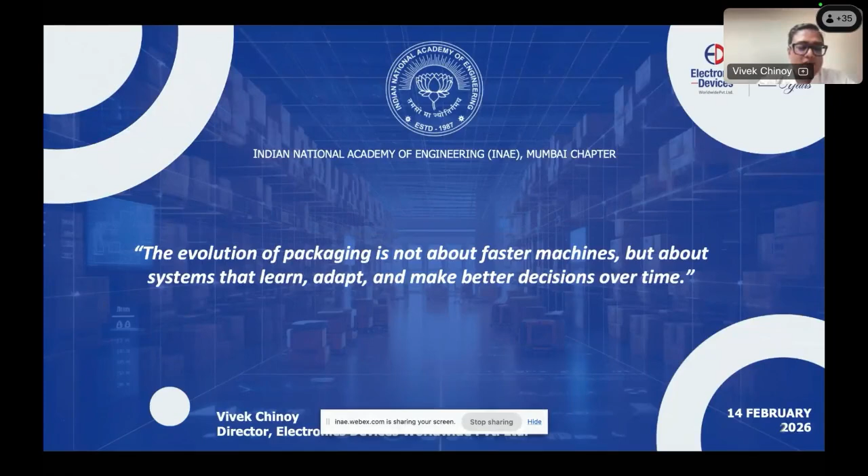Before I start my presentation, I'll take a moment to introduce the company I work for. It is called Electronic Devices Worldwide Private Limited, and it was started by two technocrats, Mr. S.V. Chinoy and Mr. R.B. Singh, who in the past 51 years have delivered many solutions for Indian industries, helping them grow and reach their goals. I will highlight a few of them.

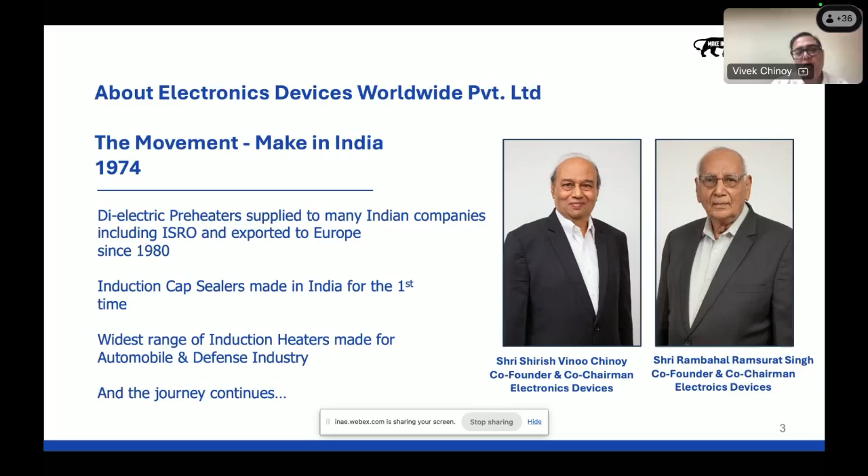The starting product was a dielectric preheater, which was used by many Indian companies, including ISRO, and it was exported to Europe since 1980. India got its first induction sealing system in 1989 by the same company. Then, when the automobile and defense revolution started, they developed a host of induction heaters to offer metallurgical solutions. So the Make in India movement was started back in 1974.

For nearly 5 decades, packaging engineering succeeded without intelligence. And that is not a criticism, it is a testament to human ingenuity. Machines executed instructions. They had no memory, no feedback, no learning. Engineering success lived entirely in the heads of experienced engineers.

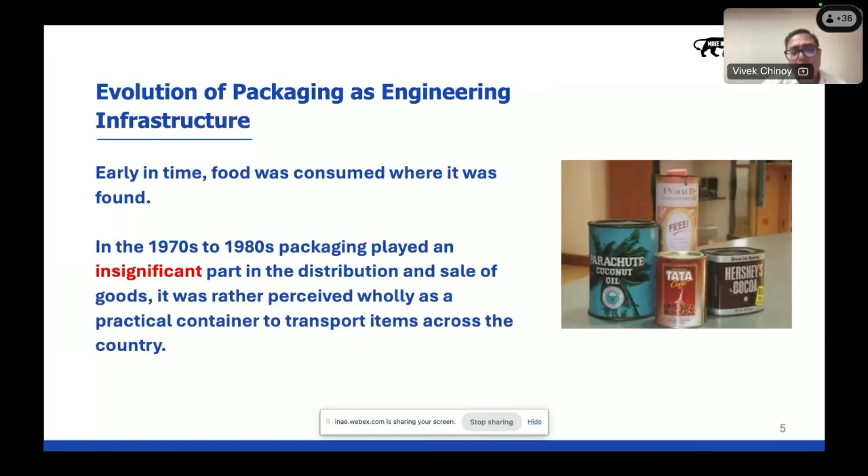Early in that time, food was consumed where it was found. In the 1970s and 80s, packaging actually played a very insignificant role in distribution and sale of goods. It was only considered as a container to transport items from point A to point B all across the country.

If we look at packaging between 1970 and 1995, the dominant question was simple: will it hold? Paper, glass, tin plate, early plastics. Engineering was very mechanical, deterministic and manual.

The GDP at that time was barely 62.4 billion, and in 25 years it grew 6 times, to 360 billion. You might remember going to a doctor and him giving you medicine in a glass bottle with a cork on top. That was the kind of packaging available at that time. However, it still contributed 10 to 11% to the GDP, not because it was intelligent, but because it was essential.

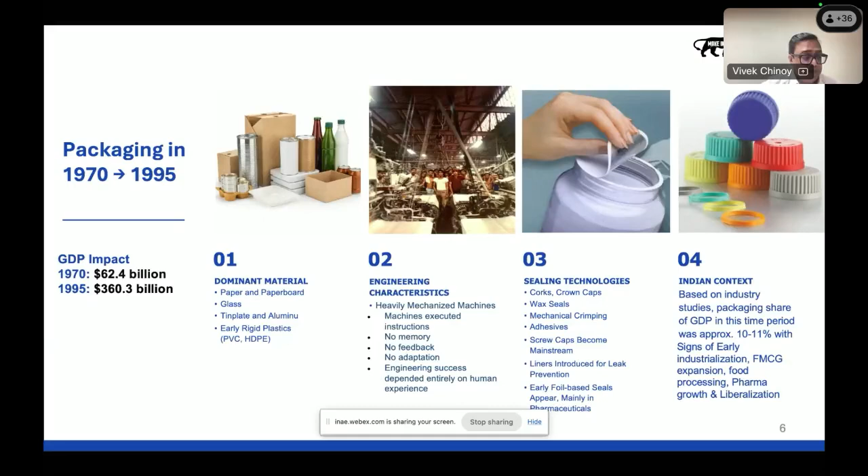Liberalization changed one thing fundamentally between 1996 and 2005: our expectations. Packaging was no longer just about containment, it was now about consistency, compliance, and credibility.

There was a lot of advancement in materials. PET bottles came into play, aluminium foil laminate liners started being used across, and multi-layer flexible packaging was also now the new normal.

On the engineering aspect, we saw that the machines which were earlier running at 30, 40, 50 packs per minute were now being demanded for 120 packs per minute. These manufacturing plants across the country started asking for continuous production lines, and there was increased focus on consistency and repeatability. And we saw a small transition from electrical equipments to electronic equipments.

This is where induction sealing quietly entered the picture, not as intelligence but as control. People wanted to control that they could move the product from their factories to consumers far away, hundreds of kilometers away. And we saw that the Indian packaging industry grew at that time from 15 to 20%.

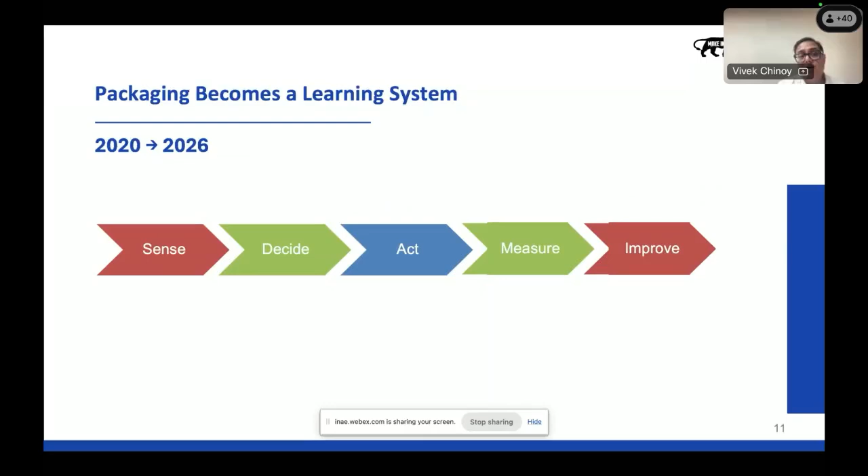Each of these machines, upstream and downstream, had to be integrated. Filling lines were integrated with online inspection systems, and connected to serialization. That means they needed data traceability throughout the packaging line. Plant managers started focusing more on throughput optimization, reliability, process repeatability, and regulatory compliance. From sealing a container to protecting the product life cycle, this was the transformation that happened.

By 2020, packaging was no longer an isolated end-of-line activity. These also gave rise and contribution to our overall GDP. In 2020, our GDP was 2.6 trillion, and today in 2026, it's almost $4.16 trillion.

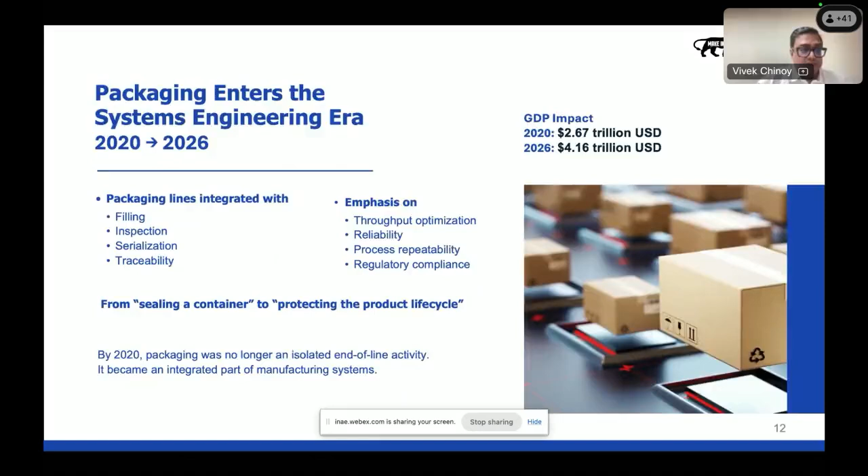Induction sealing is not important because it seals caps. It is important because it sits at the intersection of energy, material, time, and compliance. Because of so much upgradation, we are able to offer audit trails to our customers. It continues to consume the lowest power consumption per seal when compared to any other process.

In my upcoming slides, I will also emphasize zero defect sealing, which is now possible, and integration with real-time non-destructive seal integrity tests. Because of all these advancements, induction sealing became an industry norm and started being used in over 150 industry domains.

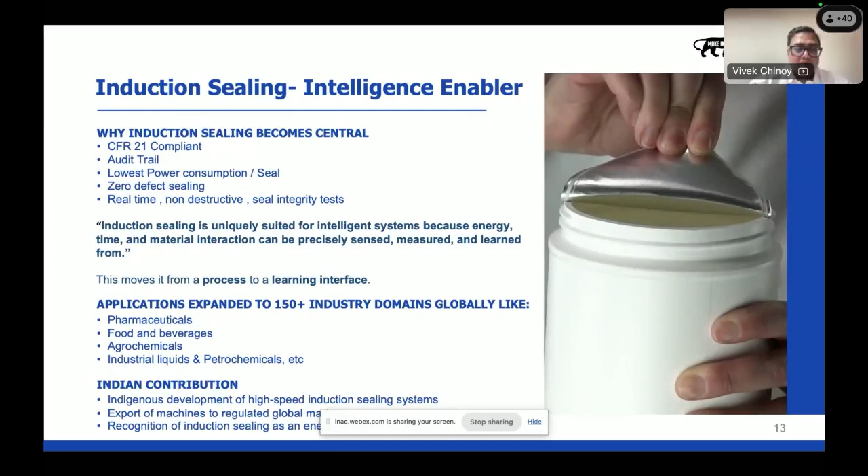Anything that can be precisely sensed, measured, and repeated is a candidate for intelligence. Induction sealing moves from process to learning interface.

Now, all of this could not happen without indigenous R&D. We are glad to inform that our R&D is world-class and is DSIR certified. We have established world-class infrastructure for power electronics, control electronics, engineering, energy efficient induction sealing systems, and closed loop process control. Our R&D department has published over 81 technical papers, of which 5 publications were selected for Best Technical Paper Award.

We have received 5 patents and 2 are pending. India did not become globally relevant in packaging by copying machines. We did it by building engineering depth. For R&D, anyone in machine building or on the technology side, R&D should not be treated as a department, but as a long-term cultural decision.

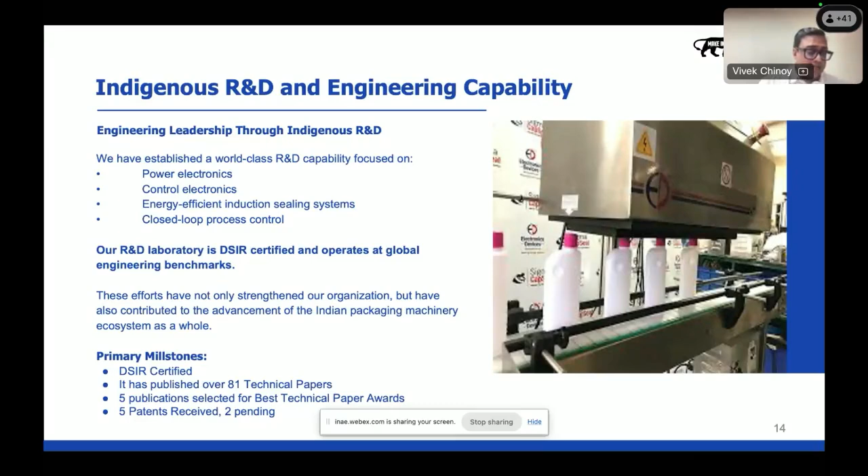Because of which we have also received many awards. We have received the prestigious National Technology Award for zero ventilated caps. Economic Times has recognized us with the Innovative Company Award. We have proudly received 6 Pack Machine Awards from IIP over 2 decades. The Governor of Maharashtra has recognized us with the Pride of the Nation Award, so on and so forth.

I want to deep dive a little more into what kind of innovation we have done and take you through a little technical side of this presentation. I'm playing a small video. Here I will be showing and discussing with you 2 approaches on induction sealing: one is the traditional approach, and second is the innovative approach which we are following.

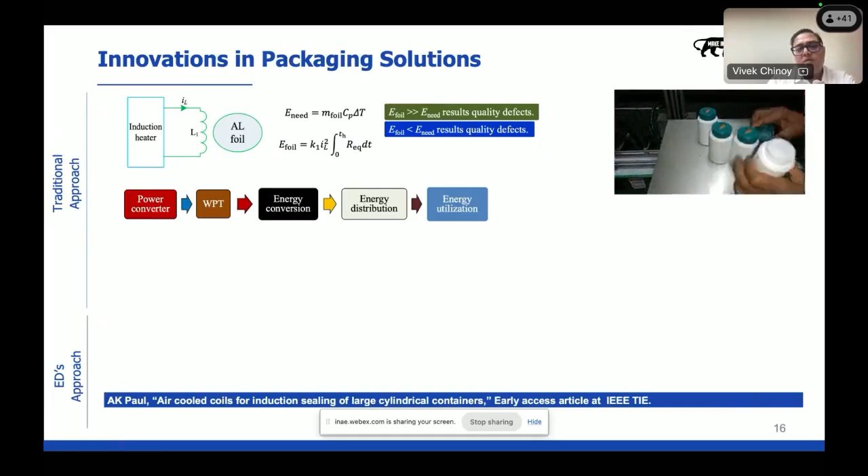In the traditional approach, in the induction heater there is a power converter which generates the power and it is wirelessly transferred. That wirelessly transferred power converts into energy, which is then distributed and finally utilized. In this traditional process, power conversion is about 97%, and wireless power transfer is about 94%. However, energy utilization is only 20%, and process efficiency is only 18.8%. This can be compared to any induction cooktop you might be using at home or have come across.

Now, what are we doing different? What is ED's innovative approach? We became active in passive components, which is the coil design. Let me show you - we are going to reveal this for the first time in the next few slides, what is actually happening inside the machine.

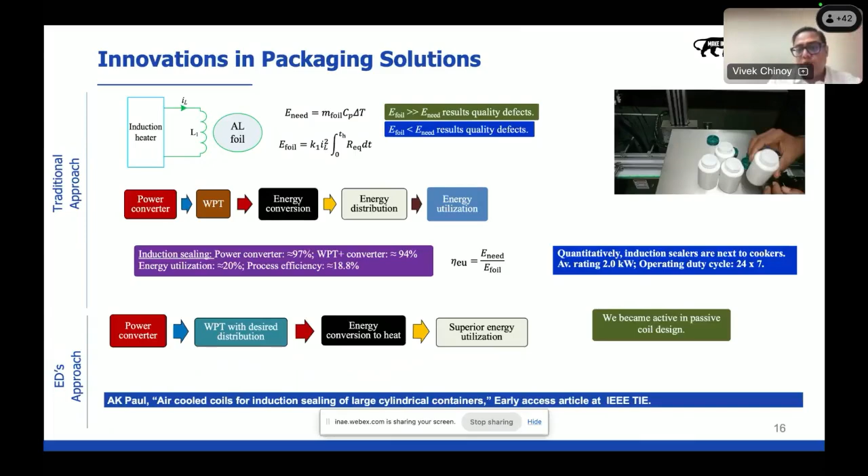The power that is converted is wirelessly transferred, and at the same time it is distributed. This is a unique approach. And because both things are getting done at the same time, the energy conversion to heat is very, very high, and because of that, the energy utilization is superior. Let me show you a little more in detail.

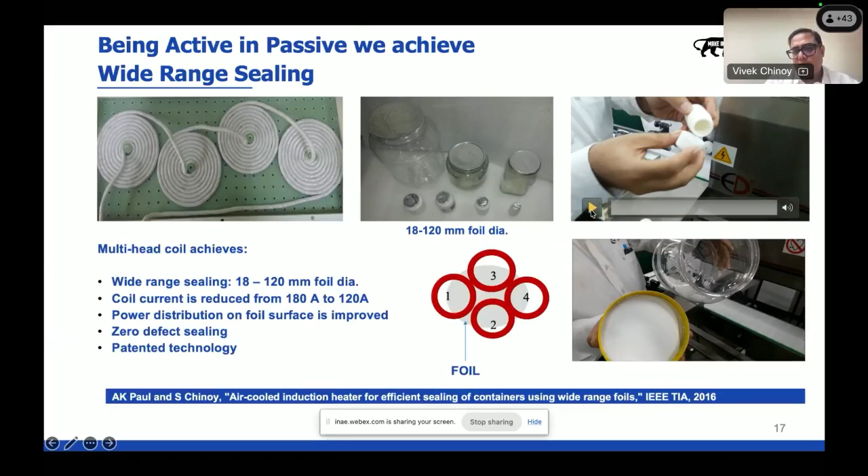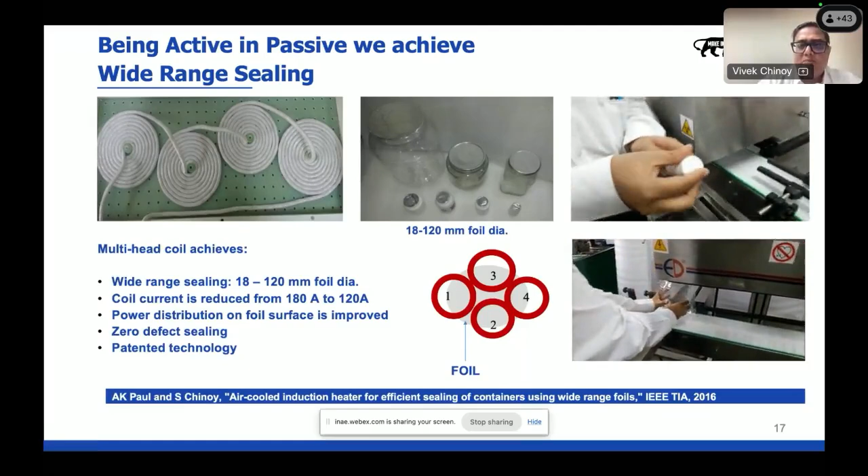This is our multi-head design of the sealing head, where you can seal 18 to 120 millimeter foil. I'll play the video of two different bottle sizes: one is 18 millimeter, another is 120 millimeter. Both are getting sealed under the sealing head at the same time with the same parameters, same line speed, same power setting. Only height is changing because of the bottle size.

What we have done differently is zonal heating. We have divided the heating zones into four. Because of this, there is no hot spot and cold spot - you get uniform heating. As a result, the coil current reduces drastically from 180 amperes to 120 amperes. Power distribution is uniform and far improved, and that has led to zero defect sealing. This is a patented technology.

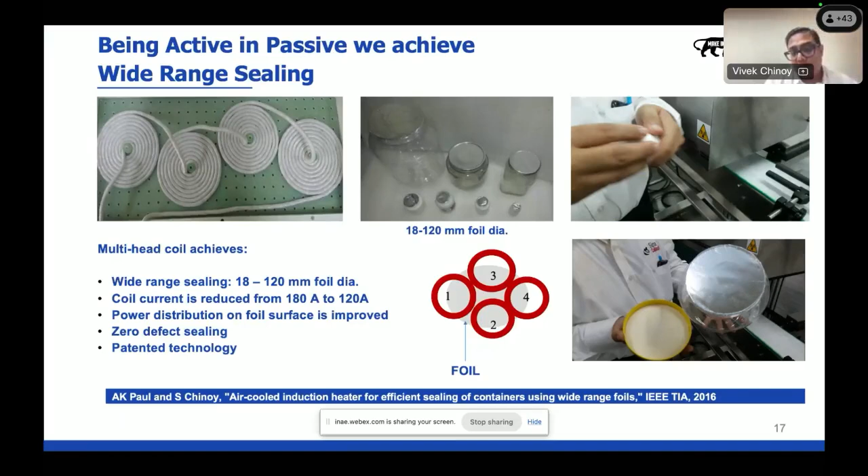Now, when I say active and passive, I am revealing a lot of technology here. This is a transition from what was happening traditionally to what is happening today, and why it is smart, and how it is helping packagers to pack or seal their containers and transport them world over very comfortably without worrying about a leak.

Back in the day, the water-cooled coils were designed like this, as the first drawing shows. And here there was a limitation. You could seal only up to a certain diameter, maybe 70 or 80 millimeters. And then when you had to seal larger diameters, you had to have a different sealing head design.

From there, we transitioned to Litz wire air-cooled coil. And here also we had a similar topology where we could do only a certain diameter, and then to do wide neck jars we had to design a different sealing head.

This was solved by designing a multi-segment air-cooled coil for wide range sealing. You can see these spirals here, this circular coil, and this is the new design where 18 to 120 bottles can be sealed very easily.

To take it forward, the below three drawings are even more advanced, because we are into continuous R&D. The first drawing is made for a wide geometry of containers, which means if you had a round container, square container, rectangular container, small dia or big dia, everything will get sealed under this sealing head at the same speed.

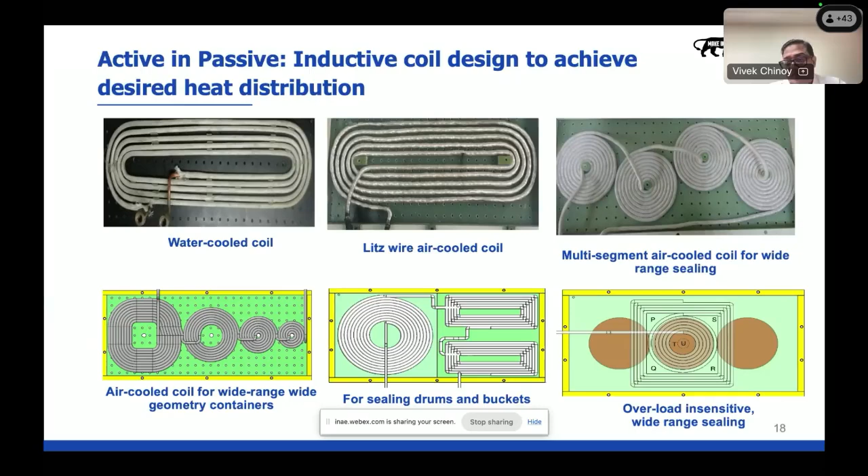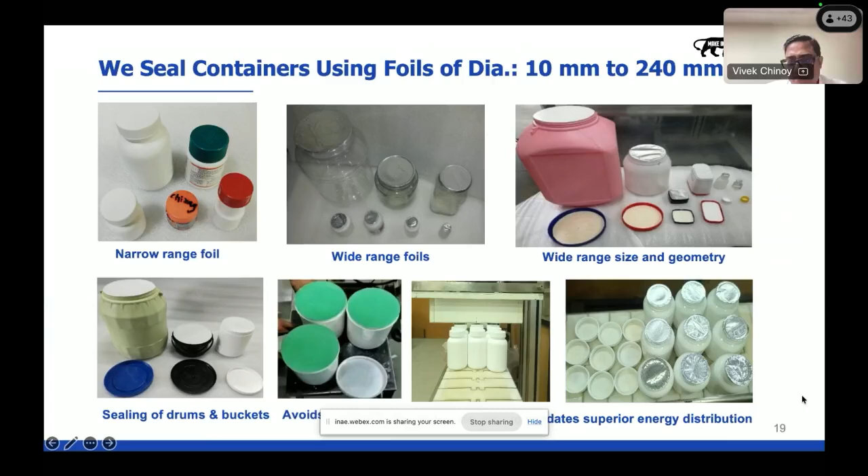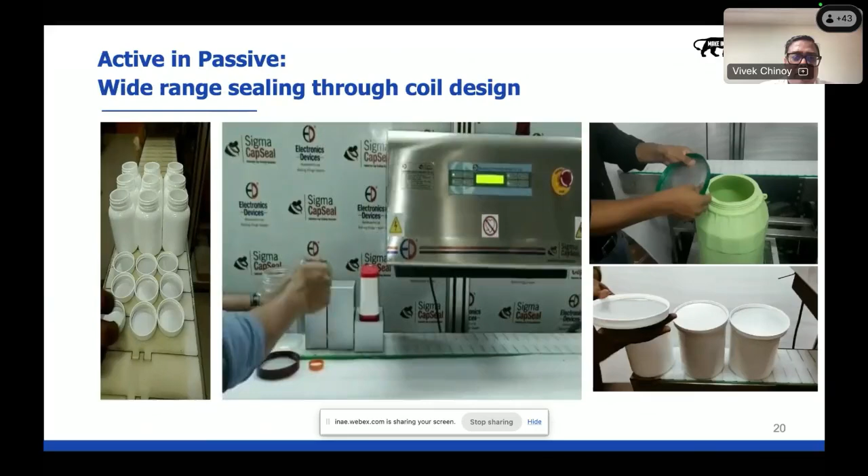These are some images of bottles when we actually tried them. I want to show you a live video of what is happening. You will see different geometries of containers. We have used some fixtures to put them at the same height so that it is easy to demonstrate.

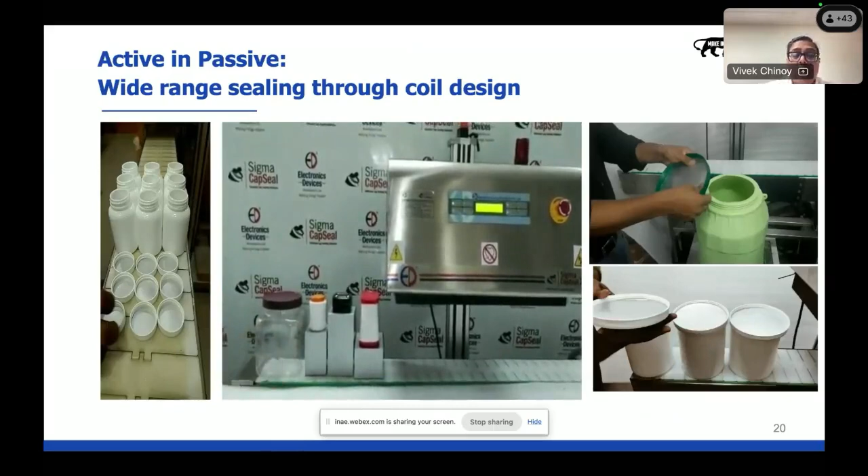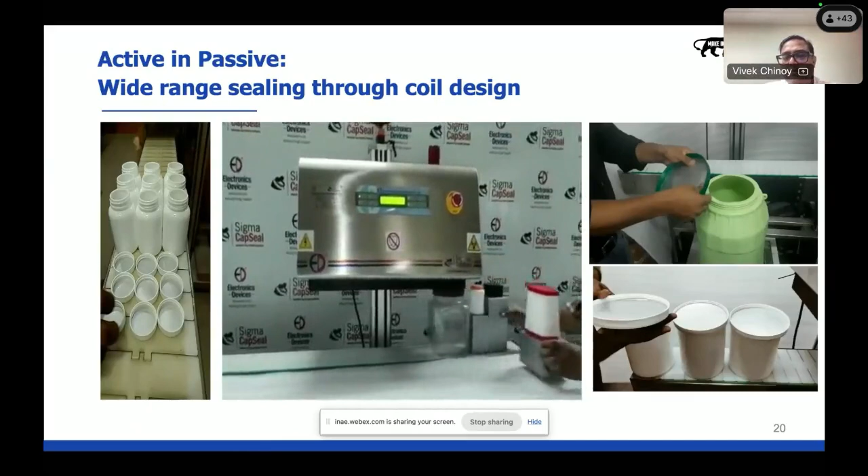Various geometries get sealed under one sealing head at the same parameters. No need to change parameters, no need to even shift the sealing head. In some manufacturers, they prescribe tilting the sealing head. In our case, no need. Very, very innovative sealing head design.

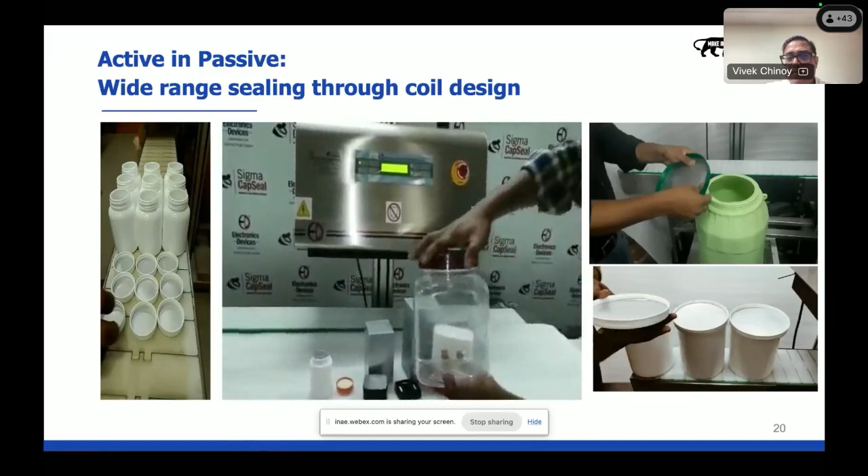This is for wide neck drums. The green cap with the big drum.

When you do this, it not only allows higher sales for our customers, but also gives them a lot of confidence that they will have a leak-proof product traveling across the country or even beyond our country's borders.

These are all oversized containers used by protein powder manufacturers and food supplement makers who have wide neck jars, which can overload the induction heater. It doesn't overload the generator at all.

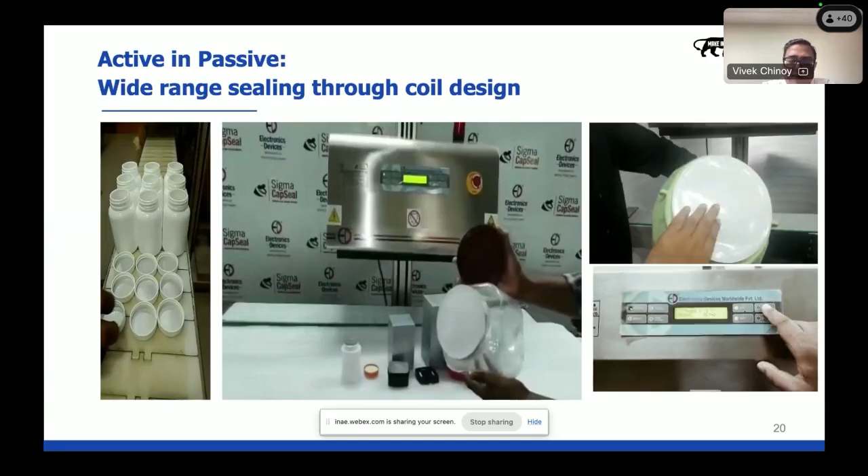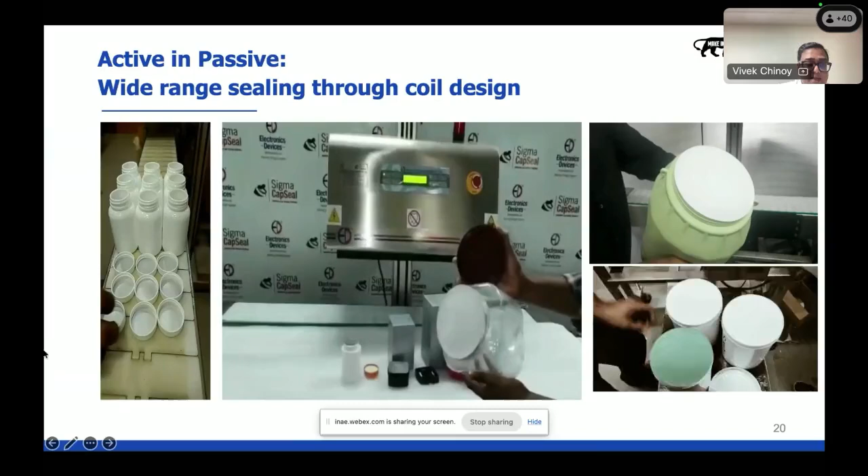Well, I have saved you the best video for the last. This is our latest multi-axial coil design where a matrix of bottles can be sealed under a sealing head without any leak. And this is happening for the first time in the world.

Traditionally, all the bottles need to travel only from the center in one line, whereas here you will see that they are traveling in a matrix. This is first time in the world and a very innovative design. This is also our patented technology.

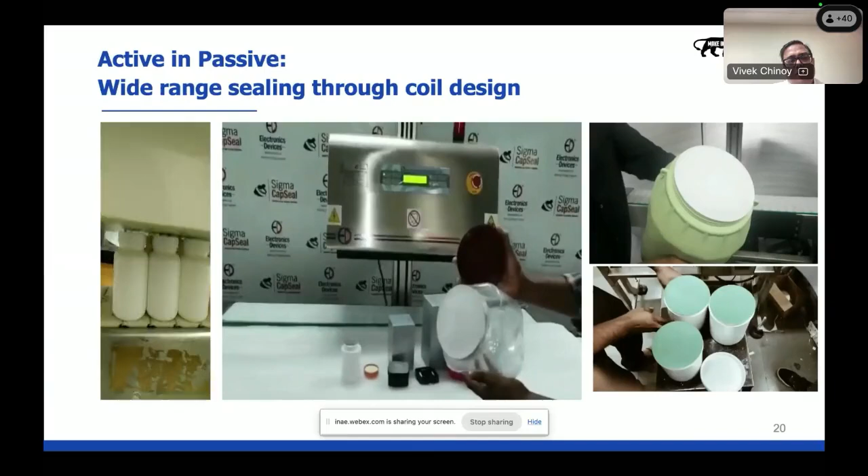So which means that the same machine can now deliver, using the same power, three times the speed. So much power saving, so much space saving also. All the bottles are perfectly sealed.

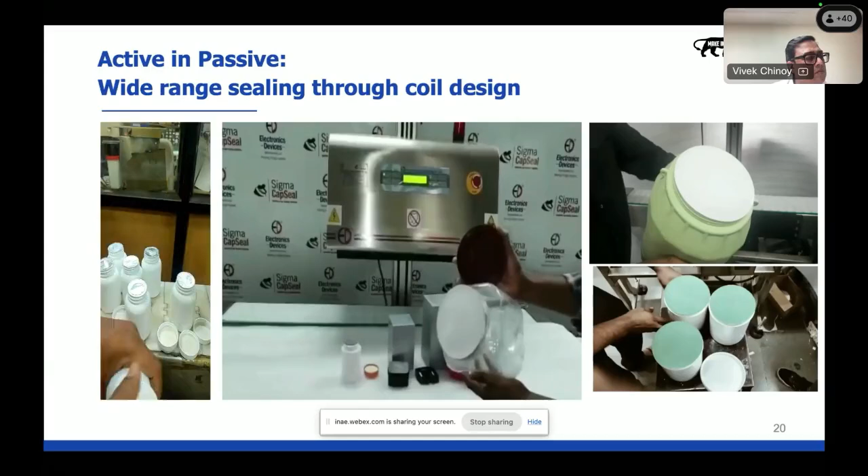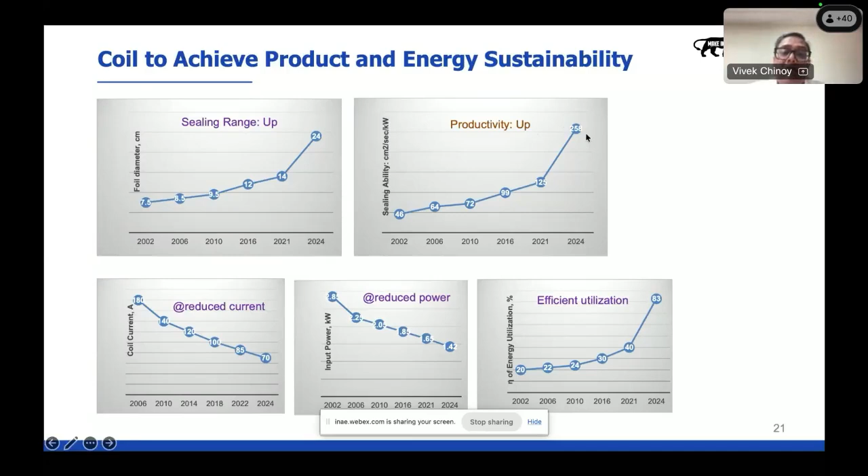I had shown you this in my traditional sealing slide. And now it has gone all the way up to 83%. So power is getting fully utilized with very little loss, and productivity has gone up. Earlier, the sealing ability was 46 square centimeters per second per kilowatt, which has now come up to 258 square centimeters per second per kilowatt. So lot of savings and lot of improvement in the overall design.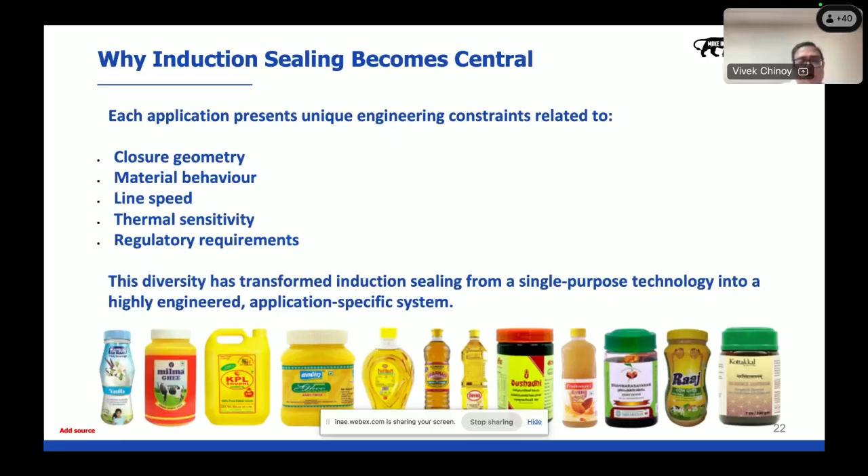While doing so, each of these applications presented unique engineering constraints related to closure geometry, material behavior, line speeds, thermal sensitivity, and regulatory requirements. By this time, regulatory requirements became more and more important, for which we had to design a new induction seal integrity testing system, which could do non-destructive tests online and give real time data.

Let me show you a video which demonstrates that.

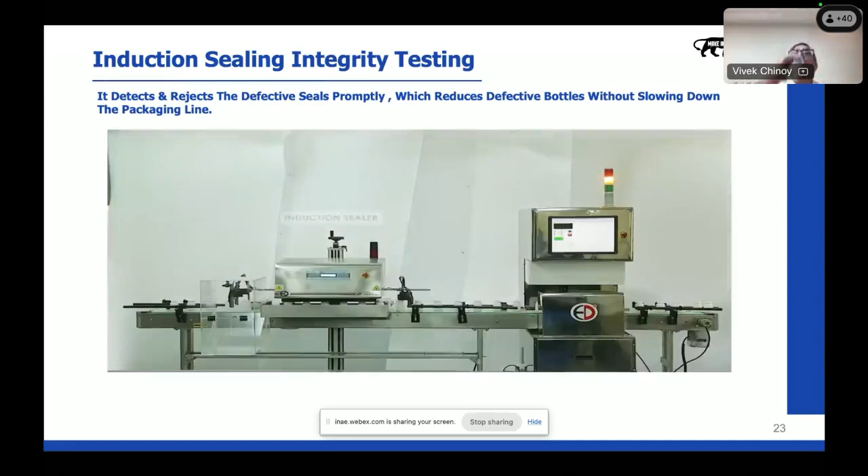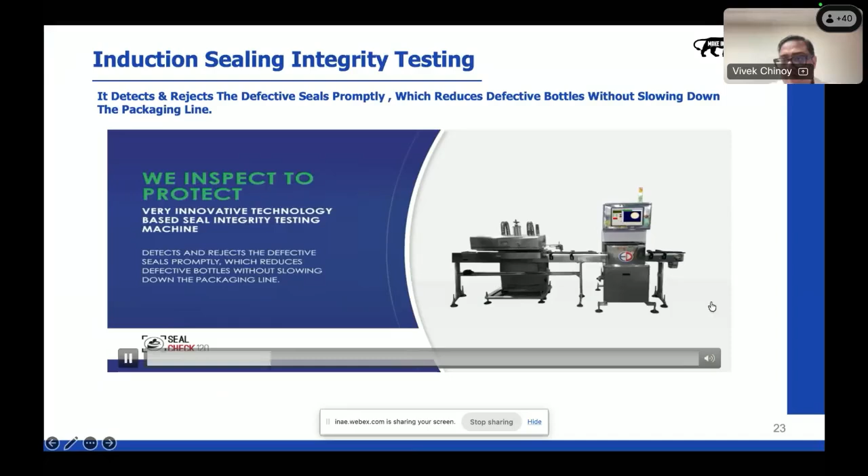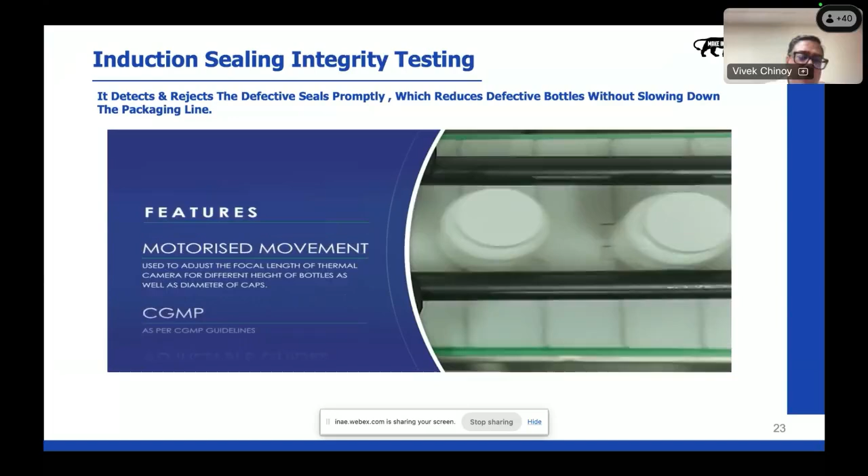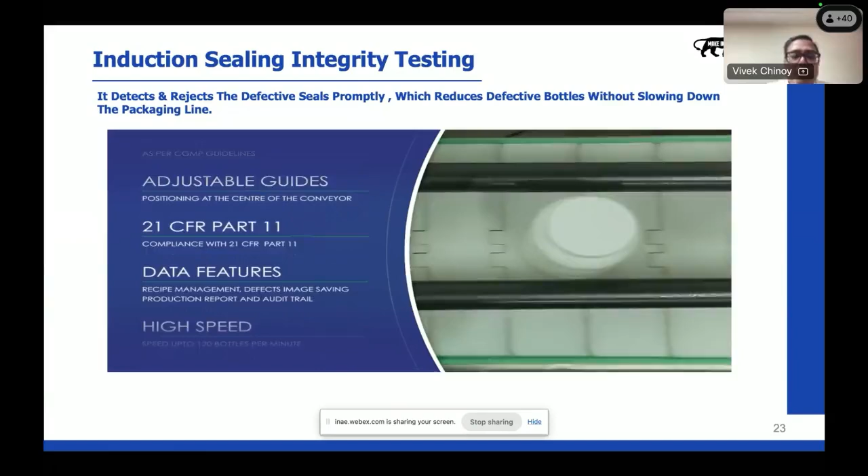This is an induction sealer which is coupled to the seal integrity testing machine. The bottles are getting sealed. When you change over from one bottle size to another, there is motorized movement for both the vision system and the induction sealer. They are both CGMP compliant. Both these systems are connected to a 21 CFR Part 11 compliant software and can offer high speed up to 120 bottles per minute.

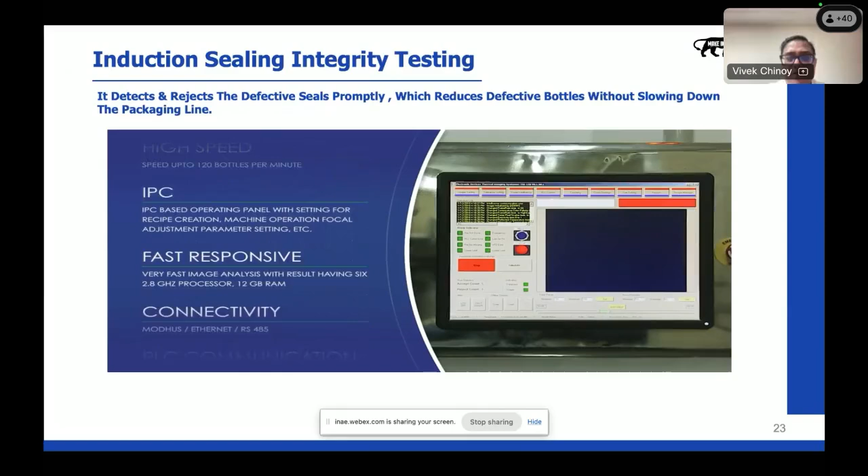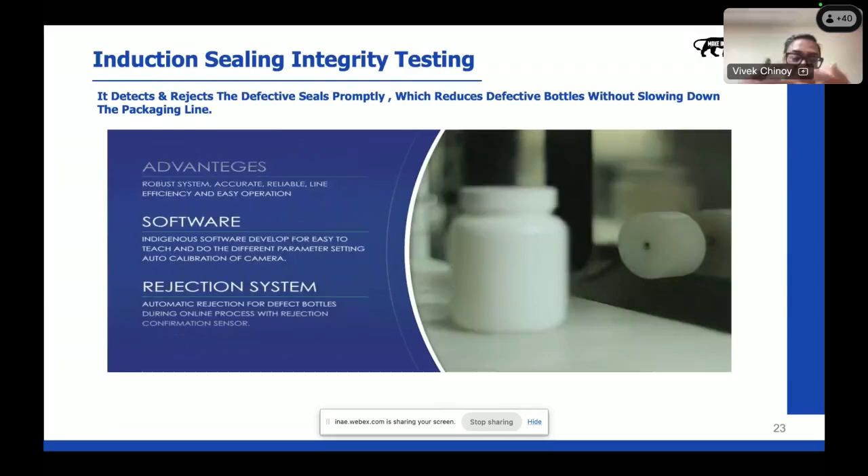Before this technology was available, people had to open the cap and really check whether there was a leak or not. There was no other way to check. Now with this, it is inline. Huge advantage.

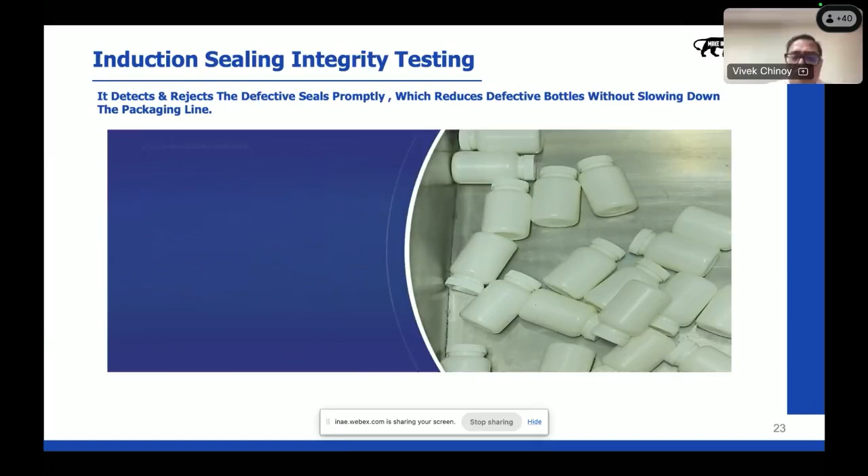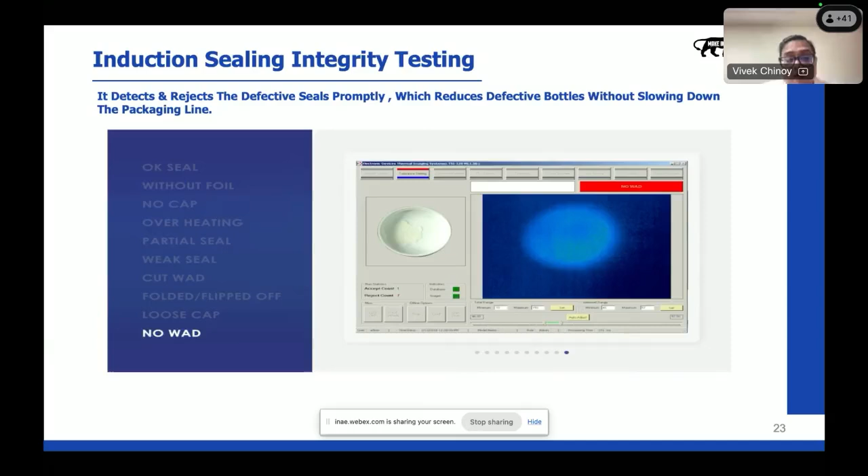So when a bottle travels under, you can see if there is an OK seal, or if it's without any foil, if it has no cap, if the heating is more, or there is a partial seal, or there is a weak seal. If the liner is cut or folded, or if the cap was loose while torquing, or there was no wad, everything will get captured and rejected.

Sustainability is not a slogan, it is an engineering outcome. Advancements in induction sealing, power electronics, and control systems have resulted in measurable energy saving. Compared to induction sealing systems available prior to 2002, one unit of energy is saved per machine per hour.

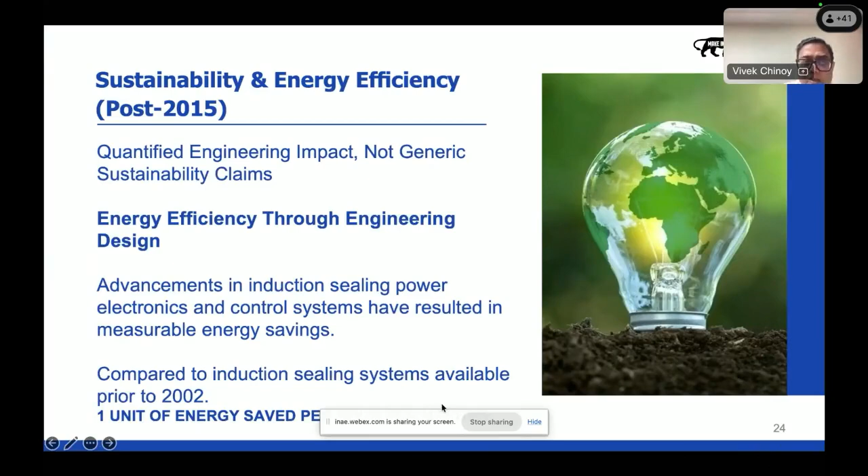Let me show you a little bit more numbers to show you what is the actual big data that we are saving here. Assuming that we work 325 days per year and we work 24/7, annual operating hours are about 7,800. Energy saved per machine per year is 7,800 units. Now, with over 20,000 installed machines globally, total energy saved exceeds 156 million units of electricity.

At an average cost of 10 rupees per unit, 156 crores of electricity cost savings have already happened. When you want to look at it from CO2 offset, almost 62,400 tons of CO2 has been saved, calculating it at about 0.4 kgs of CO2 emission per unit of energy. Now this is true sustainability, an emergent property of intelligent engineering systems. If we would not have thought about it in this way, we could not have saved so much power, and we could not have a smaller carbon footprint.

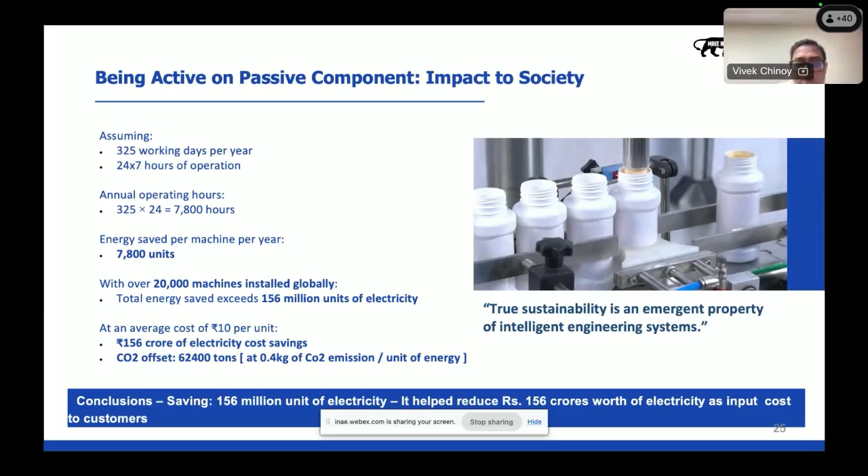I want to share a few facts again. In 2026, packaging is woven into everyday life. It carries medicines across borders, supporting healthier lives worldwide. It preserves food, letting the world share authentic tastes. Today, you can sip Indian chai in Switzerland, enjoy hot samosa in Japan. It has made living easier. What began as protection has now become a connection.

The Indian packaging industry was valued at $72.6 billion in 2020, and it is projected to reach $200 billion in 2026 due to rapid expansion in e-commerce, food processing, and pharmaceuticals. Today, the Indian packaging industry is the fifth largest contributor to our GDP.

The future of packaging is not faster machines. It is systems that observe, learn, predict, and prescribe. This definition applies equally to biological intelligence and engineered systems.

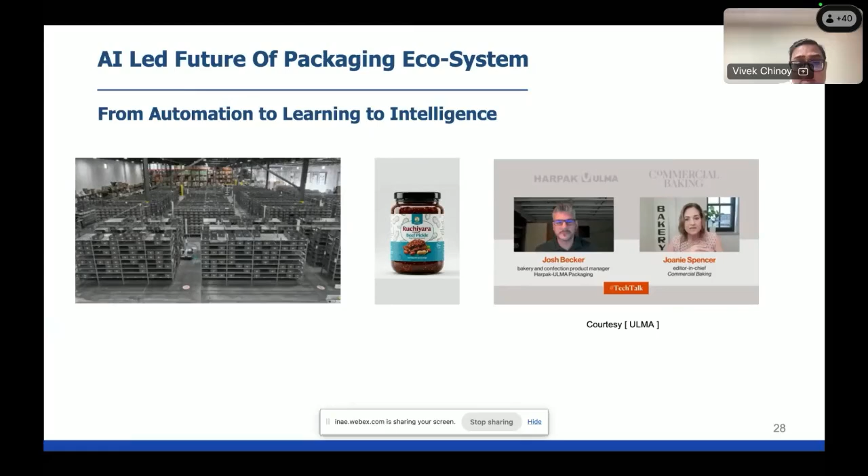So we just saw a large warehouse where material, several parts can be picked and dispatched without any human intervention, and which works 24/7. Now let me show you a video where AI is used for packaging product design. Look at this.

All these packaging designs I created using AI within minutes. So for taking inspiration or sending your proposal fast enough to your client, use this kind of AI tool. When you are using AI, it will learn consumer patterns and what didn't work for you, and it will correct your packaging design so that it becomes more consumer friendly.

So opening, closing, material, everything, even engineering processes can be defined using AI. Now this third video is courtesy of ULMA, and it is a fantastic video of how AI is being deployed in actual packaging machines for ease of maintenance and installation.

Using AI as a way to predict outcomes - do you think you could break that down for me in lay terms? When we talk about using AI to predict outcomes, what we really mean is part of the AR experience is confirming certain things are done. In order for the experience to confirm that you've replaced a certain component in the proper manner, as the operator, you could be looking at that from different angles. So how many images or processes do you need to upload so that the system can say, yes, you've done that correctly?

What we use the AI for is we can take some physical images of the highest probabilities of where someone may be installing a change part or doing a rebuild, but then we're going to use the AI to supplement with synthetic data all the other angles and photos that could be created, to ensure that depending on whatever angle the employee may be working on a piece of equipment, it's also going to confirm that it's properly done.

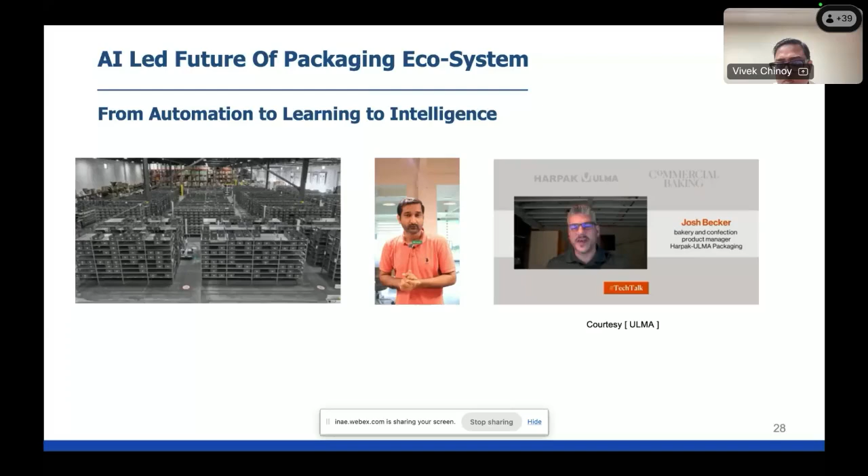So what it does, it replaces that brute force of needing to take a picture and upload every single possible angle and combination that someone could do at tasks. Now we're using the AI to predict those other angles and pictures. It's not necessarily predicting will this employee complete it properly - we're predicting all the synthetic data around it to say, yes, it has been done correctly. Wow, it's incredible.

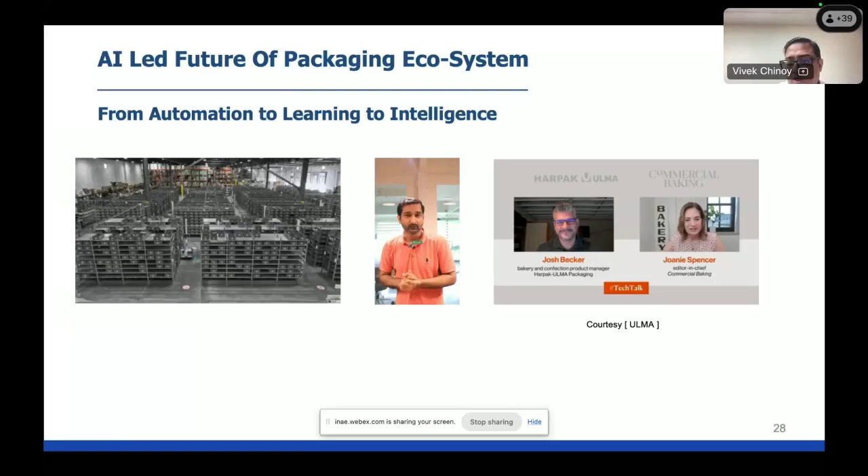Intelligence is the ability of a system to learn from experience, generalize across operating conditions, and make progressively better decisions over time under real-time constraints.

So it's not only about AI, but how it is actually applied in industrial packaging. Intelligence emerges when machines do not merely execute instructions, but adapt their behavior based on outcomes, variability, and feedback. Variability means being performed on different pack sizes.

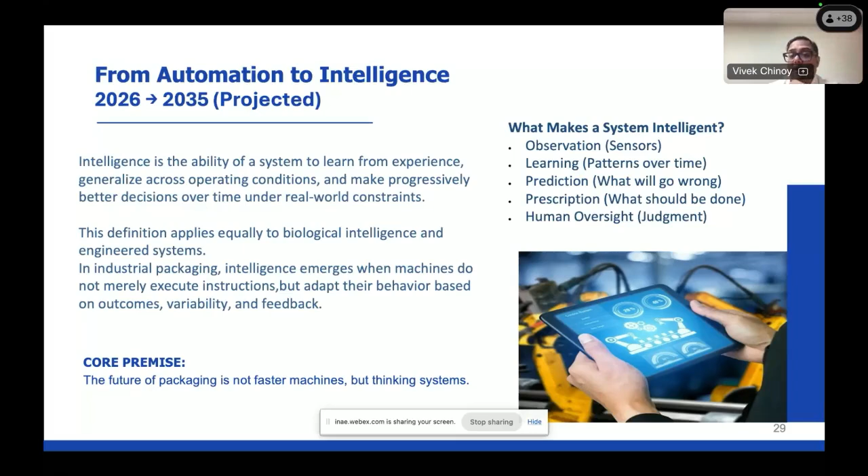So what makes a system intelligent? Observation, naturally because of sensors. Learning patterns over time means understanding what kind of problems are being faced, whether there is a pattern, and we can use AI to understand where the fault was and cure it at source. Then prediction - what will go wrong next - and then prescription - what should be done. But for all of this, we will need human judgment.

So by using a lot of AI, since I'm talking about the future of packaging, hence there is a lot of mention of AI. Plant managers and maintenance heads will now have a dashboard like this on their screens, which will be very interactive. It will help them reduce unplanned downtime, improve maintenance efficiencies, and extend machine life.

What does this mean? Earlier they were using automation, now they have transitioned to condition monitoring, and then it will help them take decisions supported by intelligence.

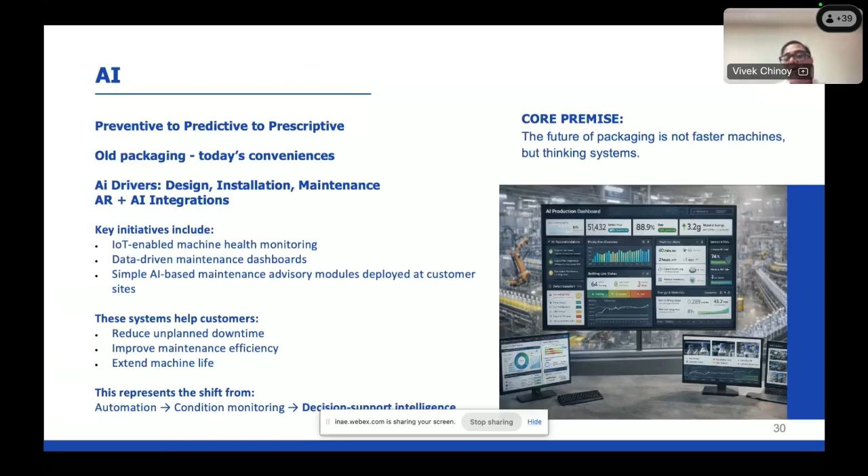A lot of work is also happening on voice-based AI, which means you will now start talking to your machines as you're talking normally. A lot of people are using Chat GPT and other AI platforms, and how you talk to them now, you'll be able to talk to your machine in the similar way, where operators get assisted on maintenance issues. These machines will now be able to provide real-time guidance in local languages. So this is a big advantage.

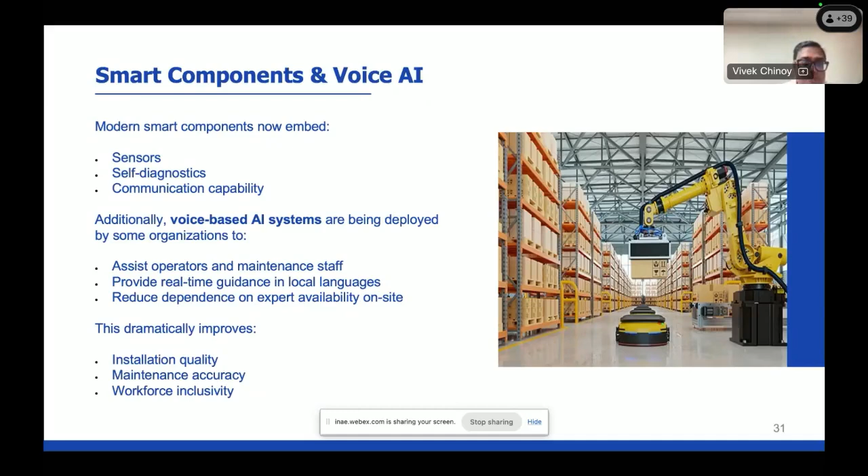So your machine could be shipped from India to UAE, to Africa, to China, to any part of the world, Italy, Spanish speaking countries, and language will no more be a barrier. You will not have to even code it in different languages - AI will do it automatically for you. So time to deploy these technologies will be much faster and much cheaper. It will also reduce dependence on experts available on site. So installation will become easy, and maintenance will become more accurate.

While doing all of this, we will have to maintain compliance. We will have a lot of digital traceability, end-to-end from raw material usage to consumer. Every product will have a digital passport—it will know where the product began its journey, in which plant, what time, what operator was there, which batch it belonged to, and all the way throughout you will have a digital passport of your product. Packaging machines will now become compliance platforms using new technologies.

I am now going to take a case study of deploying AI and IoT on a bottle filling line, which has about 5 major operations: filling, capping, labeling, sealing, and coding. You will notice a pattern across every subsystem: IoT gives visibility and AI gives foresight. Visibility will tell you what is happening, while foresight will tell you what will happen next.

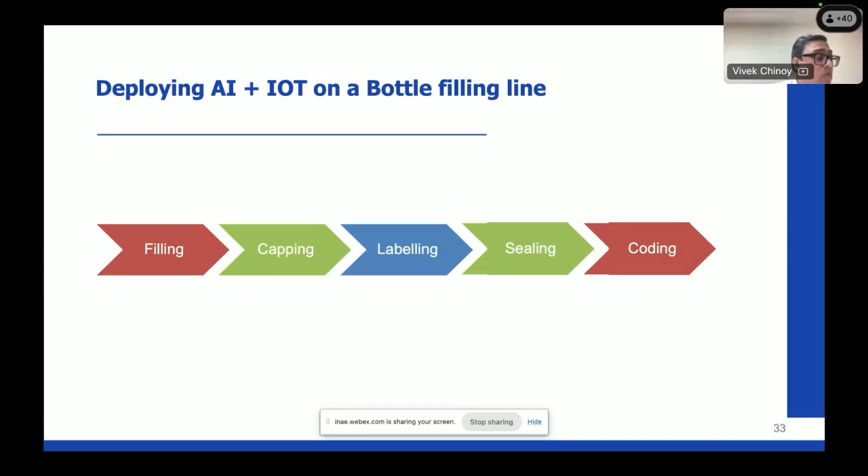Let's go ahead and see what's happening on a filling line. Typically, even today we are able to monitor flow of material per nozzle and in real time track the volume. We will now, using IoT sensors and devices, be able to measure temperature and pressure compensation—not just pressure, but pressure compensation—and there will be automatic calibration alerts. But when you deploy AI, it will give you predictive fill drift. Many materials foam, so it will also give prediction on when foaming will happen, largely in carbonated products, and there will be zero giveaway optimization. All of this will lead to reduced product loss, improved accuracy, and optimized profit per batch. That's what we are all working for, right?

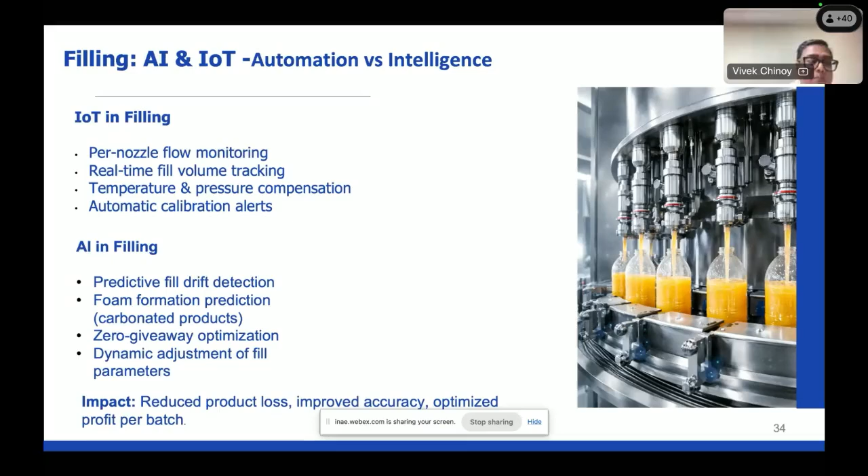Look at the capping machine. Using servo motors, we are getting real-time torque monitoring. Now with IoT sensors, we'll be able to look at vibratory bowls used to feed these caps and track that vibration, and also see if there is any thread wear out on the capping head. Using AI, this can be connected to seal integrity prediction, adaptive speed control, and self-calibration. This will lead to fewer leakages and reduce micro stoppages—all of these lines' efficiencies go down because of micro stoppages.

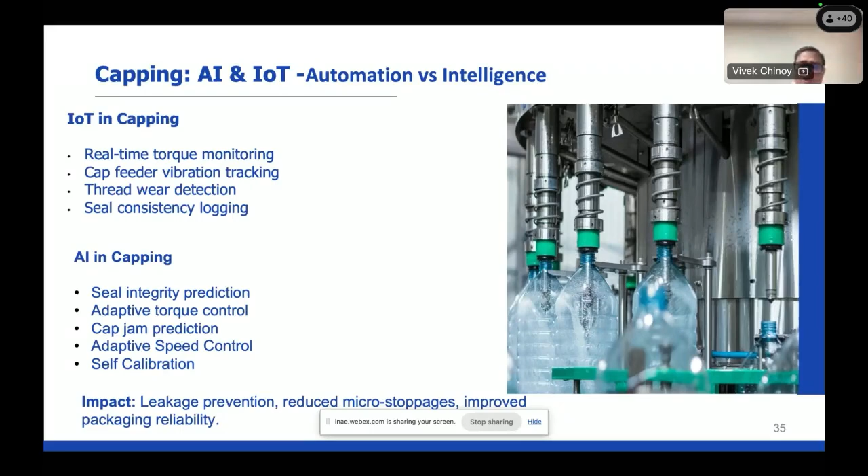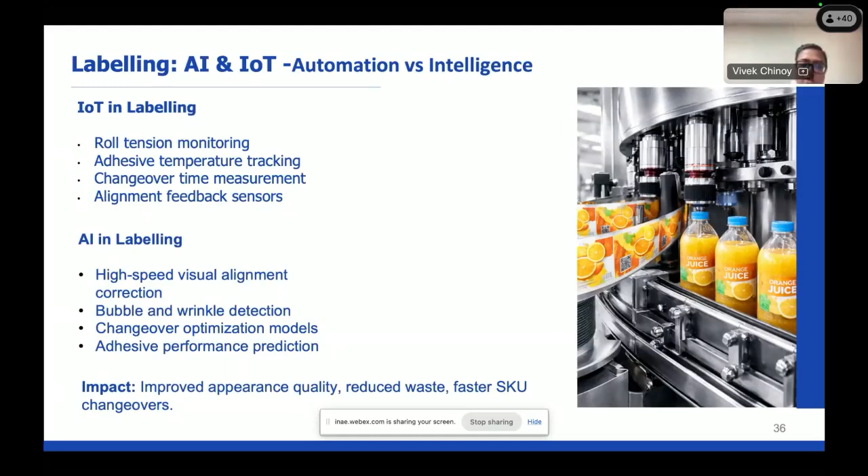In a high-speed labeling machine, imagine it's running on a big beverage line and the roll tension is not accurate—it leads to a lot of defective products on the line. Now roll tension can be monitored. Even for adhesive-based labels, temperature tracking can be done, and changeover between pack sizes with accurate measurement can happen, with alignment feedback from sensors using IoT. All of this will lead to improved appearance of the package, reduced wastage, and faster SKU changeovers.

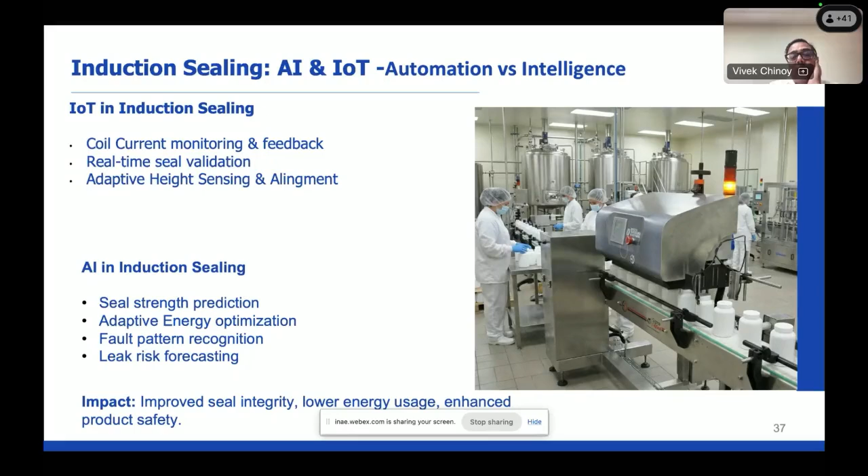Similarly, when we talk about induction sealing, even today the current of the coil is being monitored and we have a feedback loop. But using more IoT products, we can do real-time seal validation on the seal inspection system, and the height of everything can be adaptive, with recipe recall and all of this. No person is needed—just put in a bottle and the whole plant, all the ecosystem, will know that a new product has come in and a new recipe needs to be generated around it. This will give you improved seal integrity, lower energy usage, and enhanced product safety.

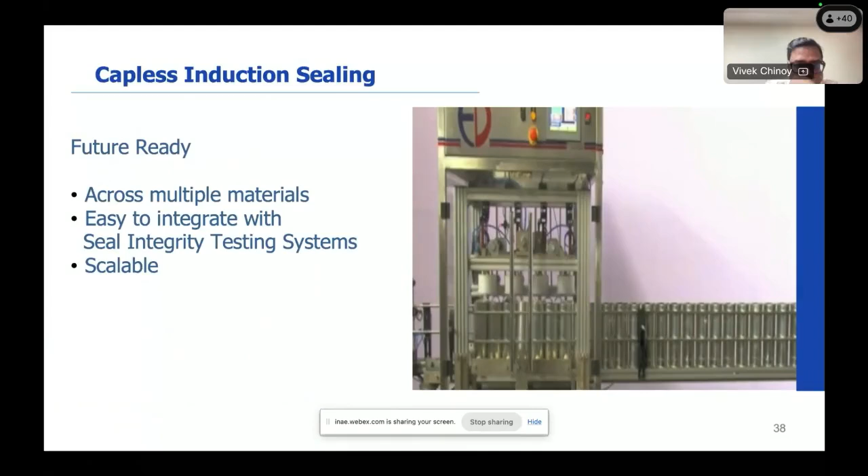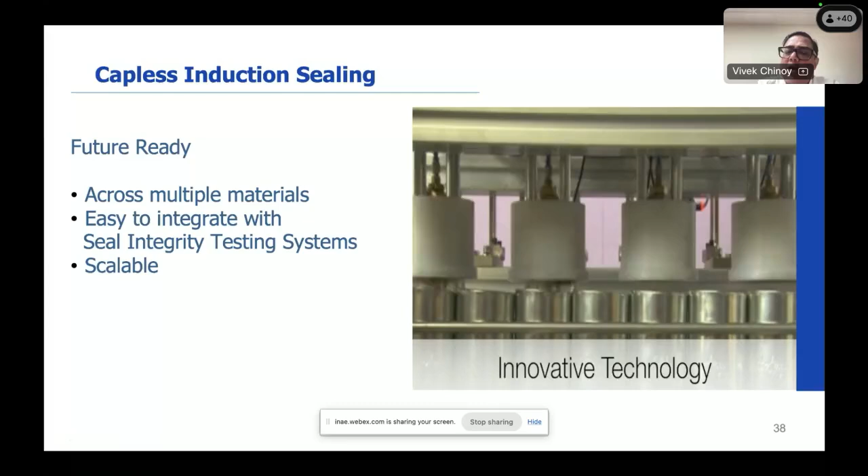Let me show you a new product line we had developed earlier, but now more and more advantages will come out of this futuristic packaging. This is called the capless induction sealer. The advantage you get is that you can seal any kind of material. We are showing you a tin container getting sealed with just an aluminum foil using induction technology. So definitely a lot of saving on power, space, and flexibility of material usage.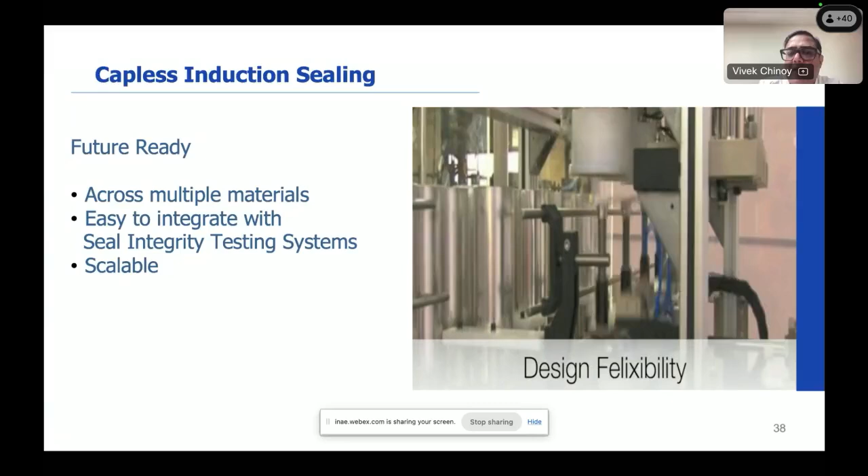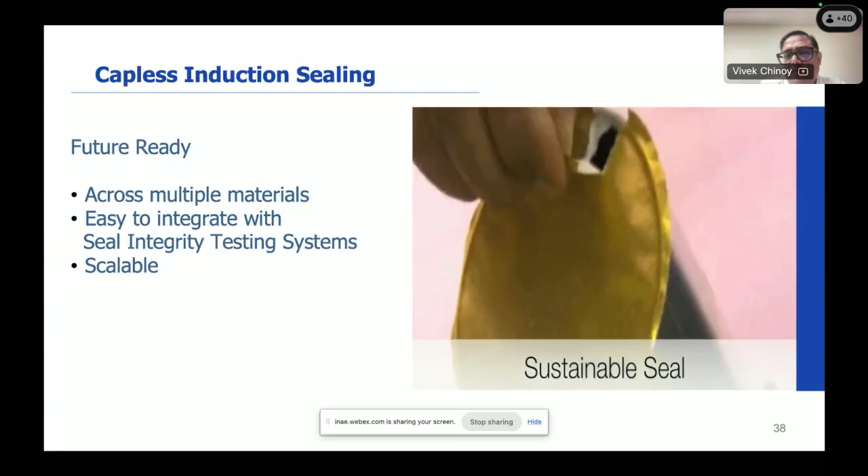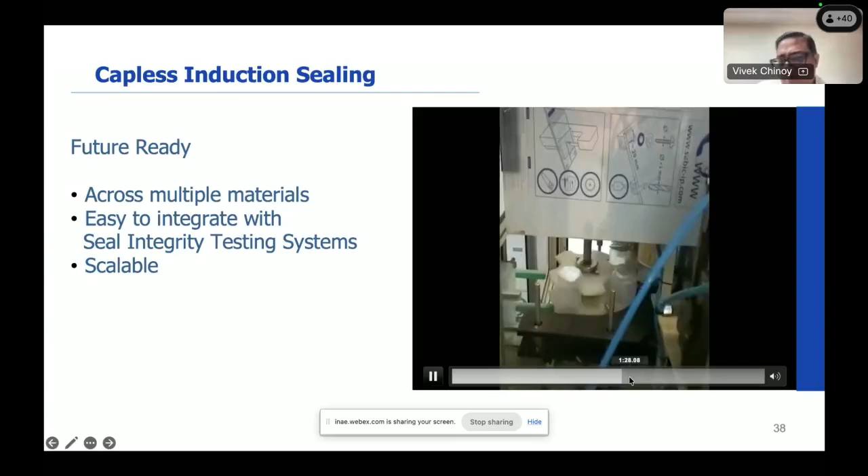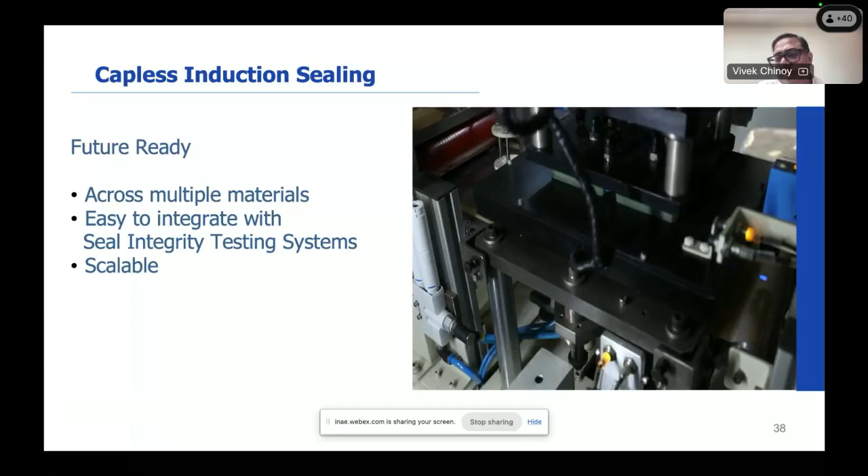And since there is no cap on top, the sensitivity of the seal integrity testing machine will be much higher and more accurate. This can be done in different formats—this is a linear format. Now I'm showing you the same happening on a rotary machine. This can also be deployed for wide containers like 10 kg, 20 kg containers carrying viscous materials and powders, fully integrated with upstream and downstream equipment.

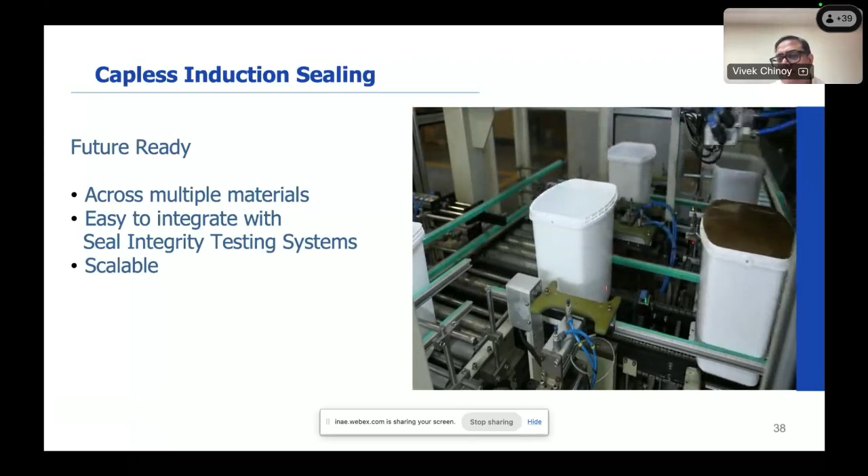The last equipment on a bottling line is the batch coding machine. When AI and IoT are deployed there, you can monitor many things which will improve regulatory compliance, reduce rejections, and improve traceability. What can be done there using AI? You can have intelligent print inspection. Legibility is also a big question because sometimes it runs out of ink and becomes faded, making it very difficult to be read by a barcode reader. So that can be improved, and anti-counterfeit integration can happen. All of this leads to a futuristic design which is more and more efficient.

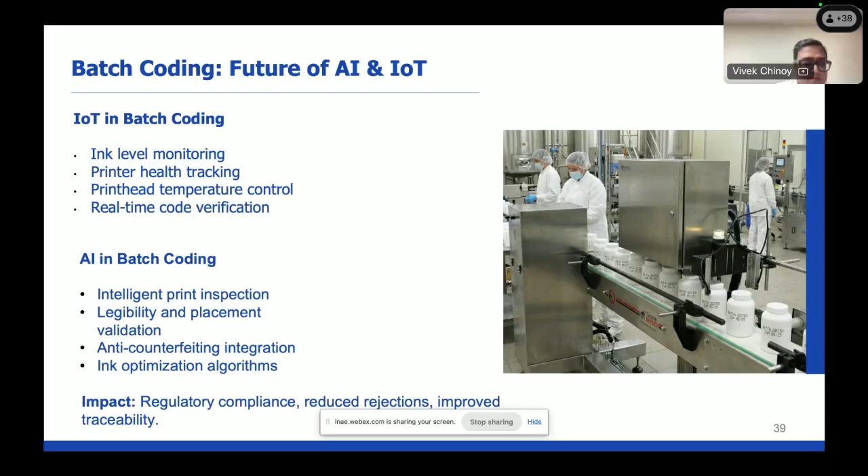AI does not replace engineers. It removes repetitive burden so engineers can focus on judgment. Intelligence amplifies responsibility—it does not dilute it.

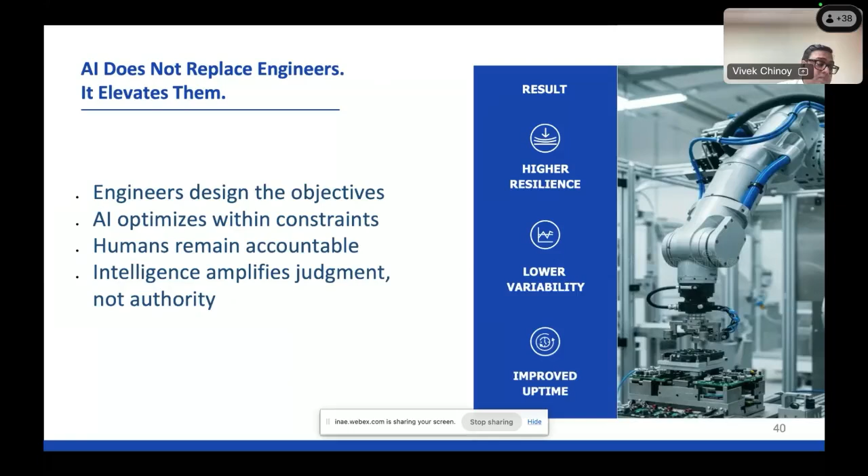What is India's opportunity? Everybody is talking about India becoming the third largest economy. The question is whether we will be standing outside and watching this growth, or whether we will participate in the growth.

I think India has a great opportunity to participate in the growth because strategically, India has strong engineering talent. It has a big infrastructure which can be cost effective. We have good experience across regulated and high volume markets. India's opportunity is not to export machines, it is to export engineering intelligence - not speed, not cost alone, but systems that think responsibly under constraints.

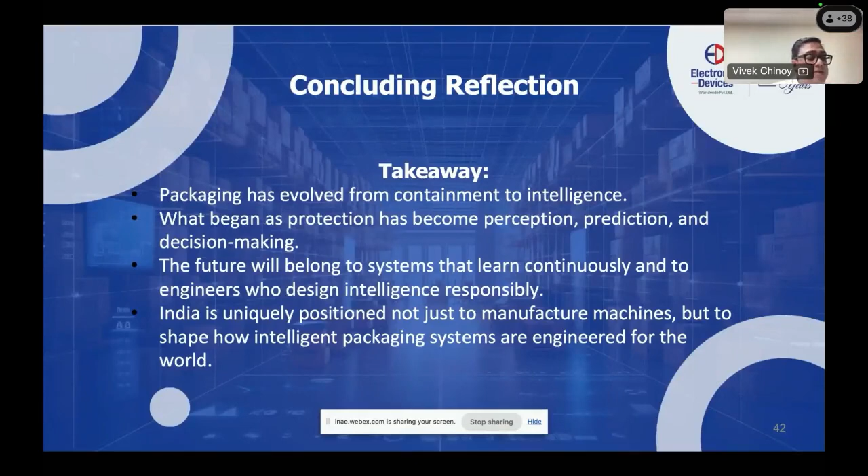Packaging has evolved from containment to intelligence. The future will belong to systems that learn and engineers who design that learning responsibly. India is ready. Let's create history together and make India a superpower in packaging.